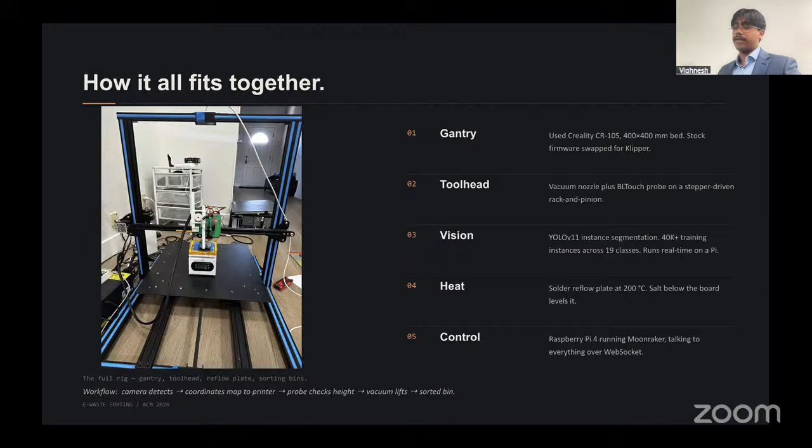So we needed to switch to a software called Klipper, so you connect a Raspberry Pi to the 3D printer, and you run Klipper off of that because typical 3D printer boards do not have the ability to run Klipper. So the Raspberry Pi treats the board on the 3D printer as a slave board of sorts. So you run Klipper on that, and that allows you to directly connect to your computer and control the motion via code. So that allowed us to tie in our computer vision to the rest of the system.

Yeah. So the toolhead had 3 major iterations. This was a pretty major engineering task. So we had a few constraints at the start. So at the beginning, we wanted to use 3 specific tools. So the tools we wanted to use were a gripper, firstly, to pick up irregularly shaped PCB parts. So that could range from inductors to weirdly shaped capacitors to connectors, things like that.

And then to pick up the flat ICs or any component with a flat top, really, we wanted to use a vacuum nozzle, which is often used in pick and place machines. And as we found out, it works quite well for the task. And then we needed a way to measure the height of each component because the computer vision system only gives us X and Y coordinates. So we needed a way to get Z coordinates.

So with these 3 tools, an issue we ran into was the fact that if you kept all 3 tools at the same height, when the gantry moves down onto the PCB and tries to pick up a component, there's a chance that a part next to the part we're trying to pick up is taller than the component we're actually reaching for, which would mean if the tools are all side by side, then one of them could ram into one of the parts that we're not focusing on.

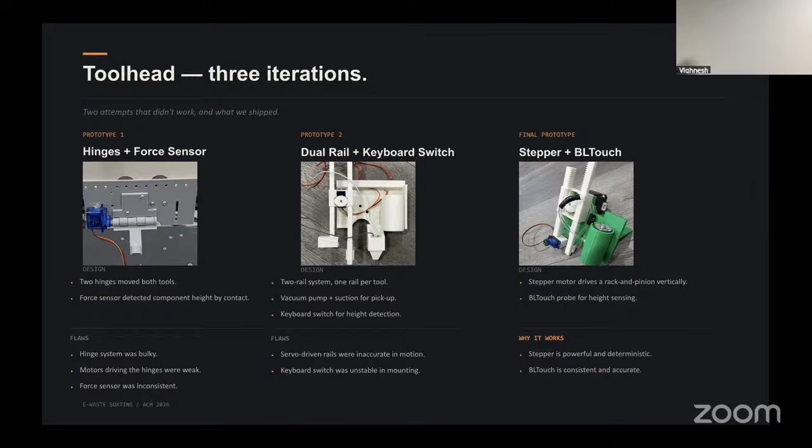So our final prototype utilized the rail system, but it also switched to a stepper motor, which has the ability to track its position. So it knows when it's at the furthest end or the other furthest end or at the middle position. And then it switched the sensor system to a BLTouch sensor, and this sensor is typically used on 3D printer bed leveling.

It doesn't get blocked. So this is a BLTouch sensor. It's typically used on 3D printer bed leveling, and it's extremely consistent in height detection because that's its sole purpose. So it goes down to each part and detects the height like that.

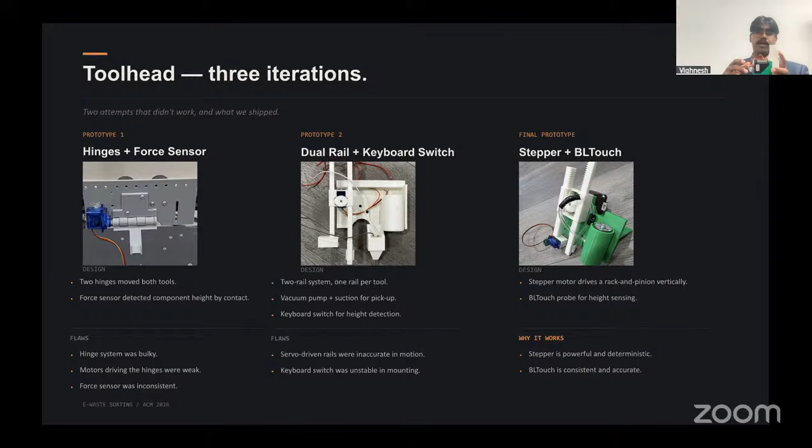And then for the rest of the system, we're using a normal 6-volt vacuum pump for the vacuum nozzle over here. And then for the electronics on this, it uses a simple Arduino Nano, which is connected to an H-bridge driver for the motor, and then a TMC stepper driver for the stepper motor. And then in the actual overall system, it's just tied to a power supply, which connects to it while it moves.

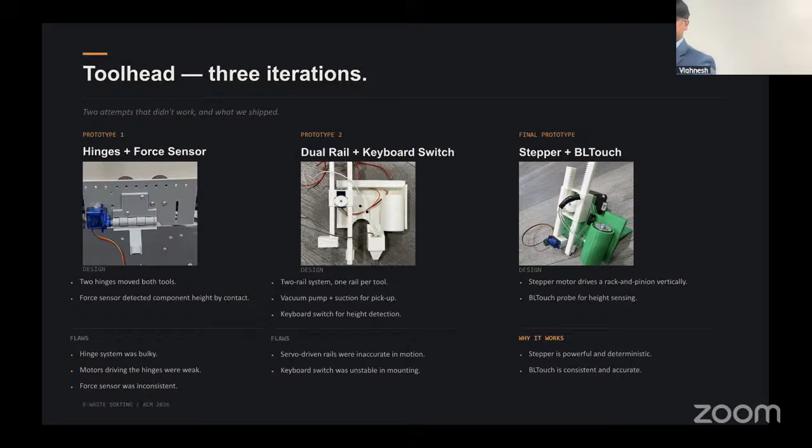And then the sensors that we went through, I already went through some of them, but just to cap it off. So we started off with the force sensitive resistor, the FSR sensor, and that gave us inconsistent thresholds. It went off at different times, which would mean it would detect at different heights.

Then another sensor we tried in between iterations was a capacitive proximity sensor. We tried the sensor because we wanted to try a methodology that didn't directly touch components, because we thought that would be better overall. The issue with this was finding a capacitive proximity sensor thin enough to not hit other components when it moved down proved to be very difficult. And the only model we could find was extremely old and gave inconsistent sensor readings. So it was too noisy.

Then we thought of using a laser distance sensor, but this was just too expensive and too bulky for our cost and our physical dimensions. Then the keyboard switch, which lacked precision. And finally, we landed on this BLTouch probe.

So the second major subsystem of our project was... Move the microphone.

Yeah. The second major subsystem of our project was the computer vision system. And this was essentially a big part of what made the project work. So the goal of the system is to look at a PCB using the camera that we have on the top of the printer there, and it needs to look at that PCB and create annotations on the individual components of where the position is, so that the printer can accurately move to and pick up those components later on.

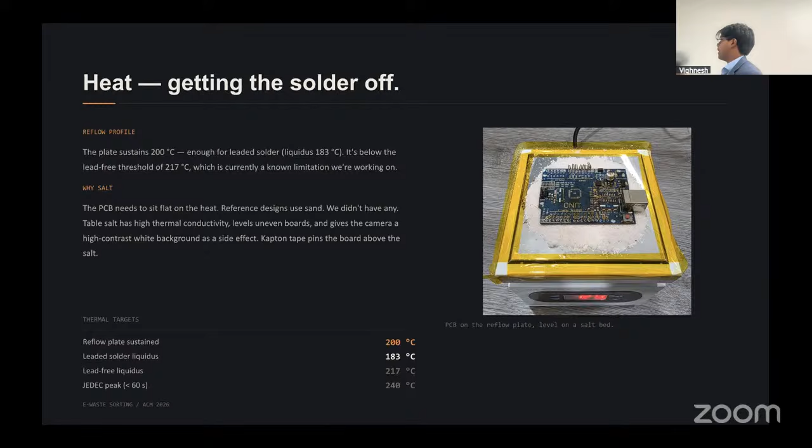And right now it's a very basic system. So we just have Kapton tape around it, and in actual use, we have Kapton tape holding the PCB down, but later we want to add proper clamps and design a heating bed that has clamps maybe attached to it and a way to level the salt properly, and that would just improve our processes as a whole.

So here's the demo of the heating plate actually working. This is obviously sped up, but in reality it doesn't take too much time to happen. And in the time it's heating up, it's not specifically getting harmed, because beyond the actual heating up part, it needs to take some time beyond that for the components to actually get harmed. So as you can see, some of the parts have already started desoldering.

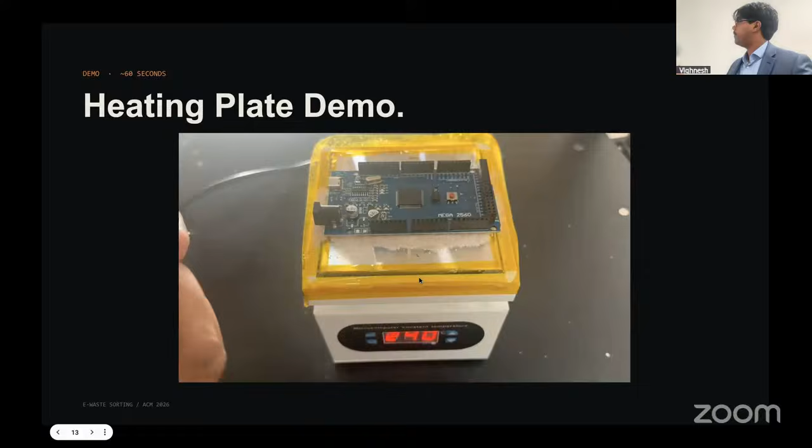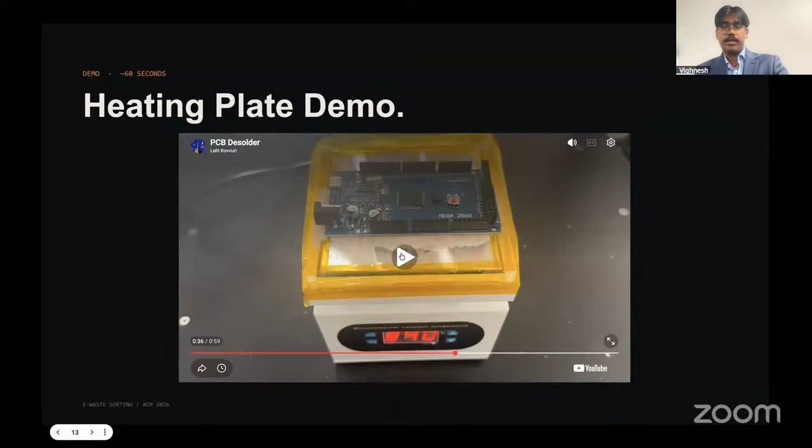So you're able to move them fairly quickly. Obviously, this is still sped up, but imagine if you have to pick off 18 parts. Then the time gets to be constrained. So as you can see, the parts move fairly easily, quite quickly, actually. Yeah.

So up until now, we had Vighnesh talking about the vision system and Rishong talking about the pickup tool mechanism. So now we also have to consider how it all ties in to the actual gantry system, combining both the vision and the pickup tool mechanism. So here's how the entire thing is wired together.

The brain of the 3D printer is the Raspberry Pi, which has Klipper on it, allowing for easy access for printer movement. An external laptop is connected to the camera and is the main player in organizing everything. The computer takes in the camera feed, runs the inference, computes the printer coordinates, and sends the G-code through a Moonraker WebSocket to the 3D printer to actually make it move.

On the toolhead, an Arduino Nano handles two of the main pickup tasks. The first one is the BLTouch sensor, and the second is the vacuum nozzle. These two are instrumental in actually picking up the components and sorting them in the right boxes.

So in addition to all of these components, we also had to have consistent power to the pickup mechanism. So we salvaged a PC power supply unit, which provides 12-volt and 5-volt rails. Each rail has a 2A fuse on the positive side to act as a safeguard. And all of these live on the single perf board, which you can see over there.

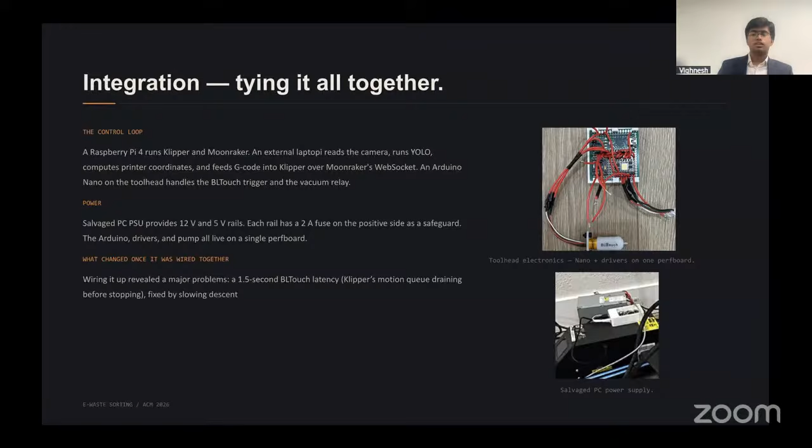So the BLTouch latency was the first issue. The second issue was in the actual hardware part of picking up a component and dropping it in the right sorting box. So the way that we wanted to pick up the component was through a vacuum nozzle. This vacuum nozzle would create a vacuum between the pump and the component. So that would result in a fixed vacuum that we thought would just drop into the box.

But what ended up happening is that vacuum was extremely strong, much stronger than what we wanted to have. So we initially thought that a good fix would be to reduce the surface area of the nozzle, because if it had a smaller surface area, then there would be a lesser residual vacuum force, which means that it would perhaps drop earlier through gravity. But this did not work as we wanted. Even though we made the surface area of the vacuum nozzle smaller, it didn't drop in the amount of time that we wanted.

So we wanted to guarantee that we get the dropping accurate every time. So what we did was we created a change in the workflow where instead of simply hovering over the box that we would sort it into, we brought the z-axis down and banged against the side of the sorting box. So even though it would take a little bit of extra time, it ensured a near 100% accuracy in picking up the component and dropping it in the correct box.

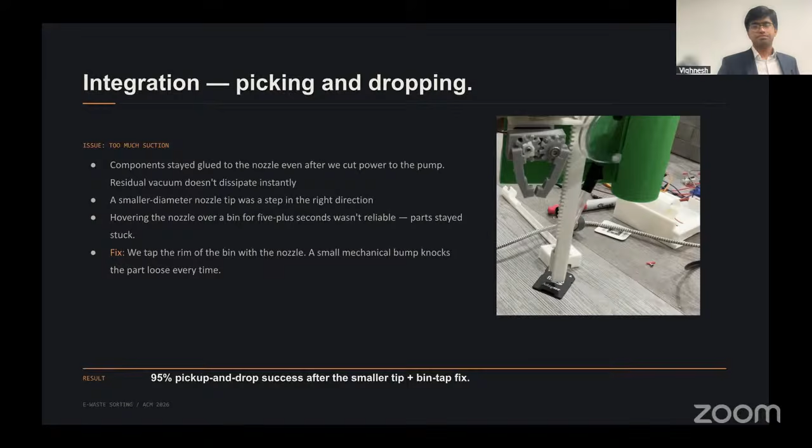So here, essentially, we have a box and it has rims on the side. So our first idea was hovering over the box, and we hoped that the nozzle would not be strong enough to hold it, and it would just simply drop because of gravity. But our issue was that the residual vacuum force that was holding the component was really strong. So we needed a way to stop that.

We wanted to drop it into the box. So what we did was instead of just hovering over, we came down, we tapped the side of the bin so that we would ensure that the component would fall into the box. Just that suction couldn't. Yeah, there was no other way. It could only suck air out.

So let's just go through a quick cycle of how everything ties in together. Step 0, which we saw earlier, was the desoldering of the PCB that Rashang showed. With that, all the components on the circuit board would be desoldered, so they will be easy to move. Step 1 is to home all the axes. This is an especially important part because in the homing position of 0, 0, 0, there'll be a reliable place where the camera could see the circuit board every time.

So here we have a live demo of the system. Yes. Let me just restart. Oh, sorry.

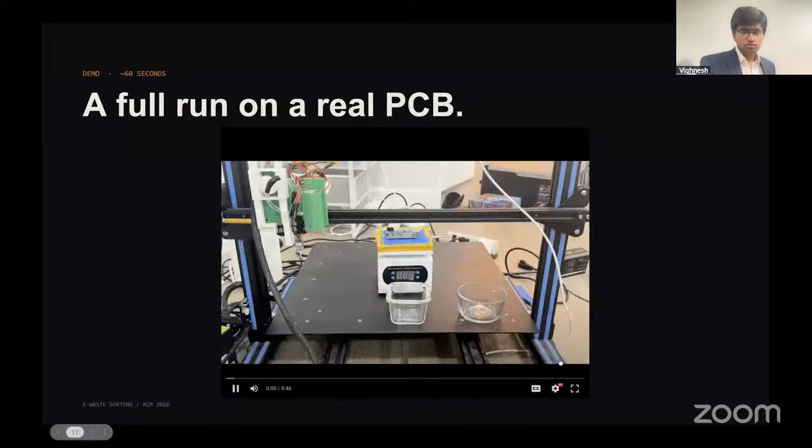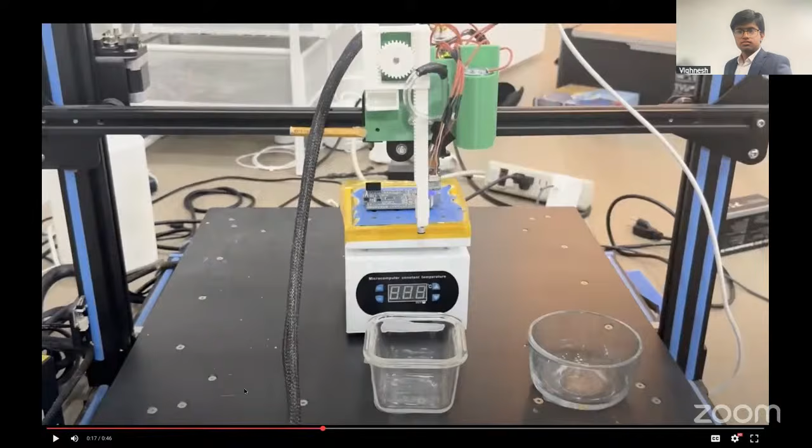So right there, you can see it probing the first oscillating capacitor. And then it probes the integrated circuit for the height. Yes.

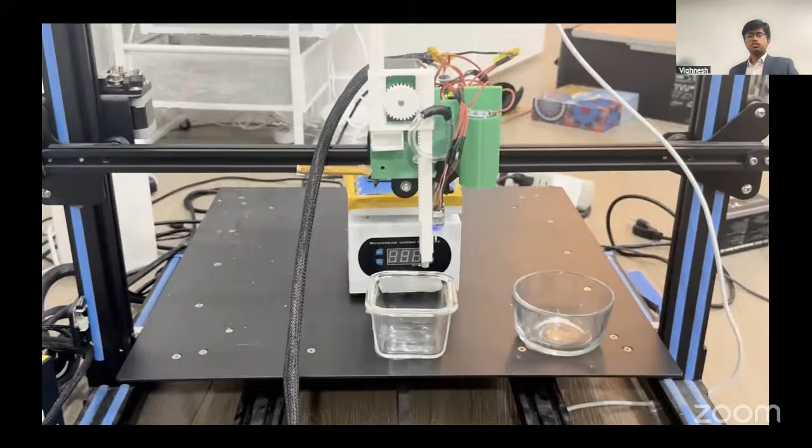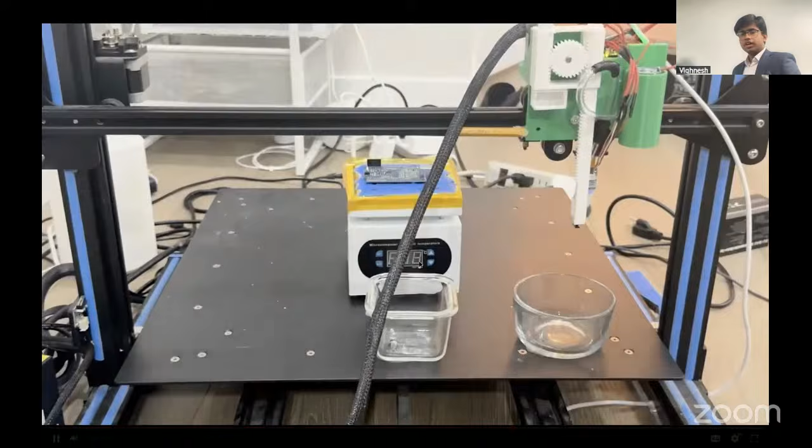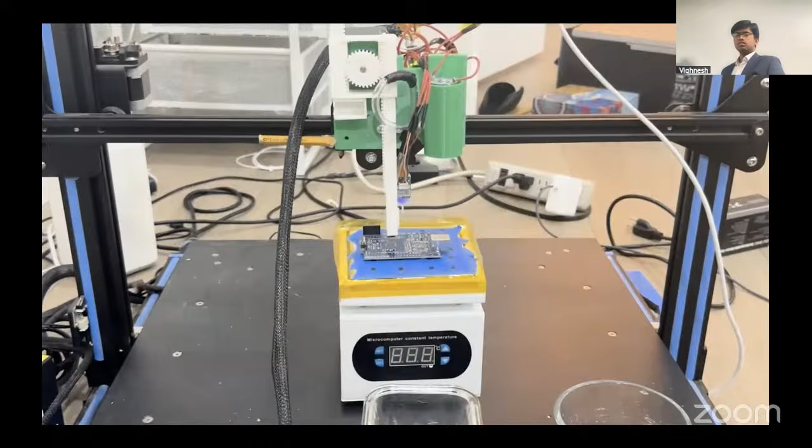So now let's talk about how it performs. So as Vighnesh previously mentioned, it has an 86% detection rate for mean average precision, 79% classification on the real test board, and a 95% pickup rate after it taps the bin and drops it into the right sorting box.

The pixel to printer coordinate transform has an accuracy of around 0.89 millimeters, and our throughput component rate is 6 components per minute. Although it's not at one of the extremely high end versions of a disassembly machine, it is a pretty competitive and a pretty fast metric for our component rate. Finally, we have our total cost coming in at $345, which Vighnesh said was around a third of our initial budget.

So yeah, obviously, this project, when we came into it, it was under the constraint of having a working prototype by the time we get to the Synopsys Science Fair. So that was about a 5 to 6 month window, which wasn't enough to fully flesh out our idea. So if we want to fully flesh out the idea, our first step is to get a consistently working gripper. So as you may have noticed in the first demos of the system, I talked about a gripper, but there's not actually a gripper on the system.

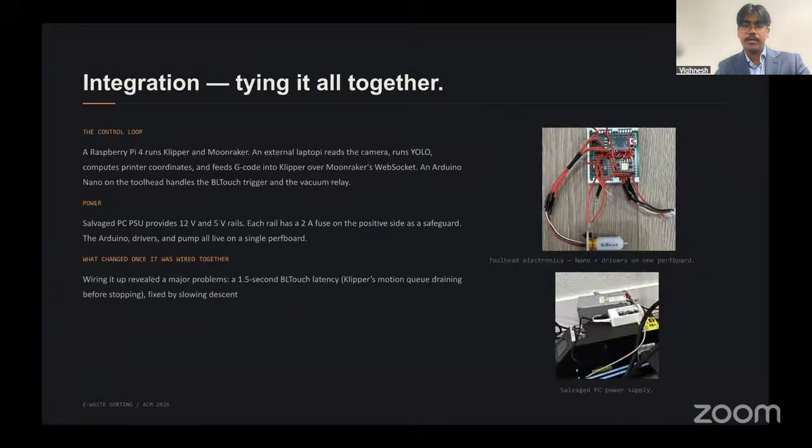But that talks about another thing I want to improve in the future. It's number 7 here, but I'll just skip to it. It's a Core XY gantry instead of a Cartesian gantry. So our current system uses what's called a Cartesian gantry, which, let me show it here. So this is a Cartesian gantry. And what a Cartesian gantry does is it moves the printing bed itself, the bed where the items would typically be 3D printed on, forward and backward.

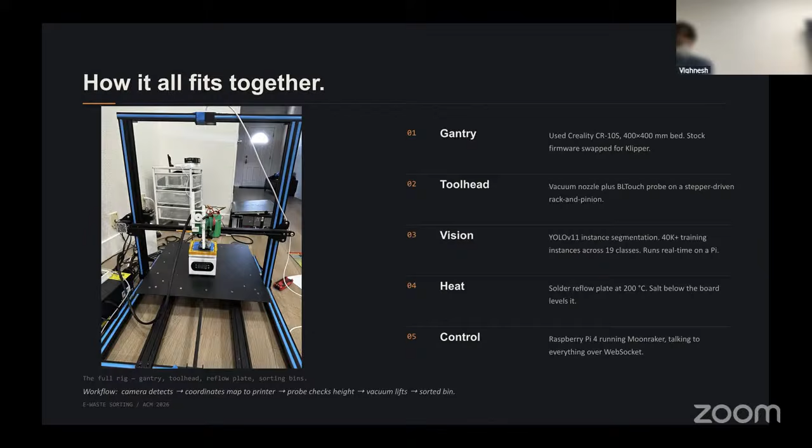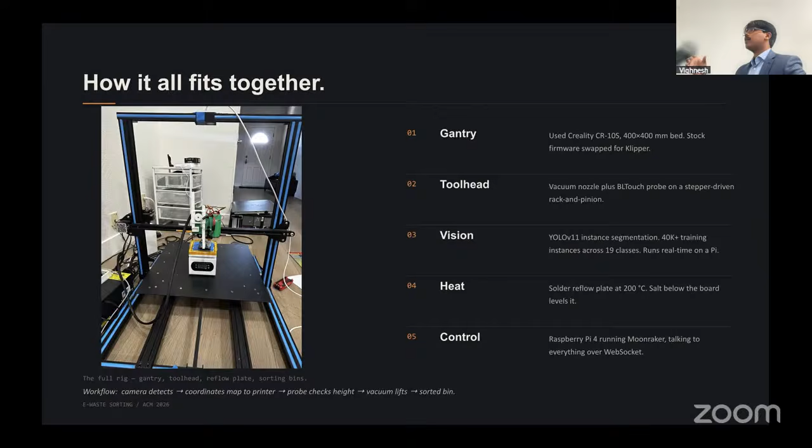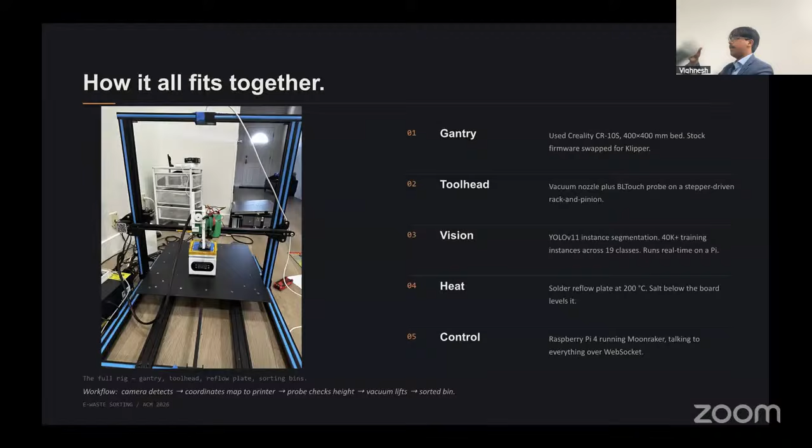Then it moves the gantry and the nozzle, it would typically be a nozzle on a 3D printer, up and down using linear rods, and then we move it left and right with belts. The issue with the system is it's quite out of date. Most modern 3D printers don't use Cartesian systems anymore. If they want to prioritize speed, they use something called a Core XY system, which only moves the printing bed up and down and then allocates X and Y movement to the extruder. So it would be like a box, and the extruder would move front and back and then left and right, and the heating bed would only move up and down.

And the thing with this system is it greatly improves speed. So if anybody's heard of Bambu Lab, the 3D printer company, their printers can print up to like 400, 500 millimeters a second, or millimeters a minute. Whereas this 3D printer, I'm pretty sure it only goes up to like 100 at best. So it's extremely slow. 6,000.

Yeah, of course. And another thing is, as you said, if the print bed moves forward and backwards, even though I feel like there's a low chance, there's still a possibility of parts moving. So if it only moves up and down, that completely eliminates the chance of it moving from left to right, because up and down won't cause that issue. So that's one of the major fixes we want to do for the system.

Another change we want to do is have a larger heating bed. Right now it's only 100 millimeters by 100 millimeters, but if we want to heat up larger PCBs, obviously we should have a larger bed that has the ability to do so. And then on the vision side, we want to broaden our data set and our vision system. So possibly improve the camera within a budget, still within $1,000, and also diversify our data set.

So Greg actually brought this up on our science fair day. He asked if our system could differentiate between individual ICs, because some companies might want to focus on a certain IC that would bring more profit to them. So we want to diversify our data set and possibly collect data that might allow us to differentiate between individual integrated circuits that might bring the most value. So you could just put in a PCB, say, I want this list of integrated circuits or parts, and it could pick them up and sort them for you specifically. So we want to diversify the system so it brings more profit.

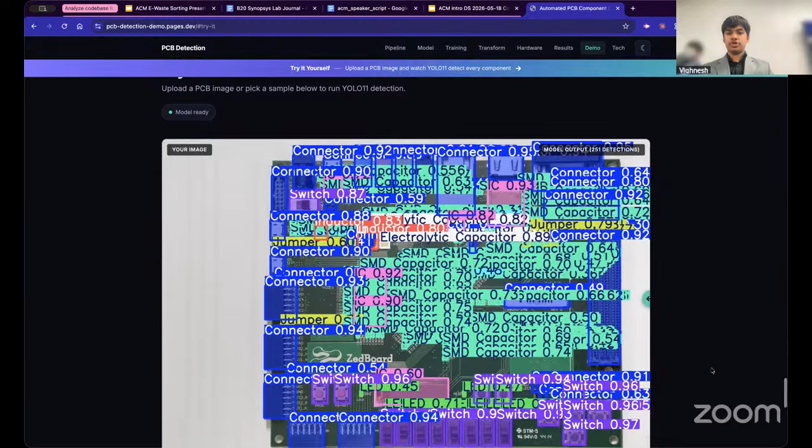Cool. It's not Colab. We just run the .pt file through the website. The Colab was just to develop it for the training. So here you can see the annotations. The pink is IC, the purple is switches, and obviously this is kind of busy to a human viewer, but the computer will be able to understand it, as Greg mentioned previously.

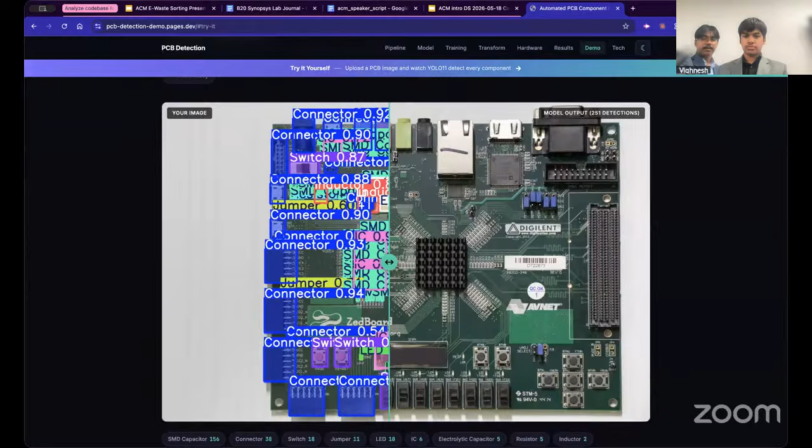And you can also compare it to how the PCB looked originally. So you can see the mapping. So obviously it identifies those as connectors. The ICs, as he said, it's very messy. But yeah, you can see the comparison here, and you could upload images of your own if you want to try it out yourself.

Is this because that's the one? The size limitation of just checking it out? No, it'll just be limited to how large the camera frame can capture. Also resolution. Yeah, the higher the resolution, the better.

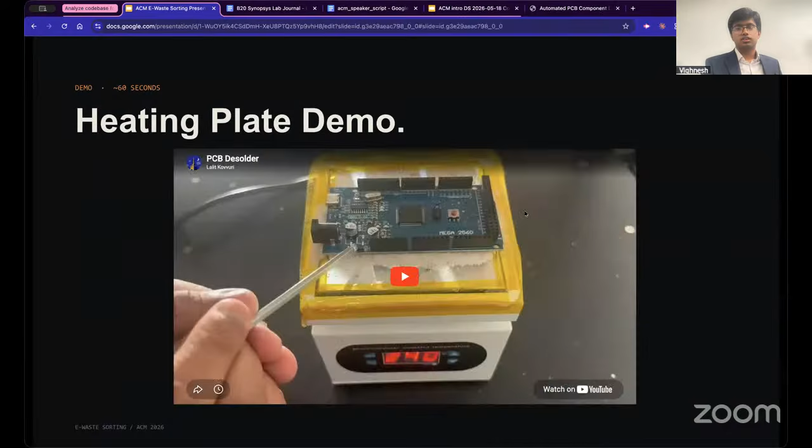It's a supervised learning problem. Ah, they have points where it should be. There's the points that the sensor reports. There's the gap. And then what they're doing is training the system to minimize the gap. So instead of correcting the plot, they're adjusting. A translates to A prime, B translates. Yeah, we wanted to account for that distortion. Instead of just eliminating it, we kind of embraced it.

Teacher, any comments on working with them on the project? Yes. I've been judging science fairs for 10, 12 years, but I haven't talked to too many teachers, so. The three of them came to me in September last year.